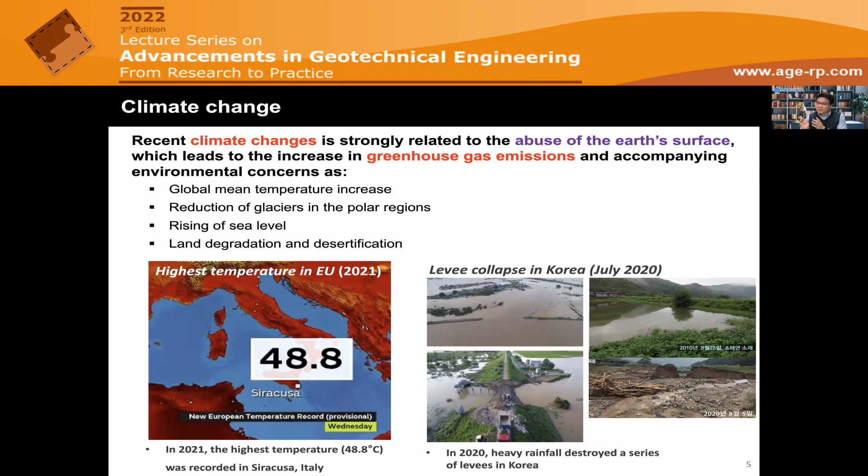So what does this mean? The Earth is getting hotter and hotter, and that climate increase is resulting in more severe and more frequent geotechnical engineering hazard events. So what happens all around the world? We have more concentrated and heavy downpours, and they are inducing and rendering floods.

And sometimes these floods can also accompany severe failure, subsequent levee or earth dam failures due to these abnormal climate events. So just 3 years ago, we had a very severe dam collapse in Laos and a very heavy flood in Japan, which also caused serious and significant casualties and costs.

Furthermore, as a result of global warming, more intense wildfires are happening all around the world, resulting in increased land degradation and geotechnical engineering risks such as landslides. And as a lump sum, we are facing more and more severe economic damages and costs related to these climate change related geotechnical engineering hazards.

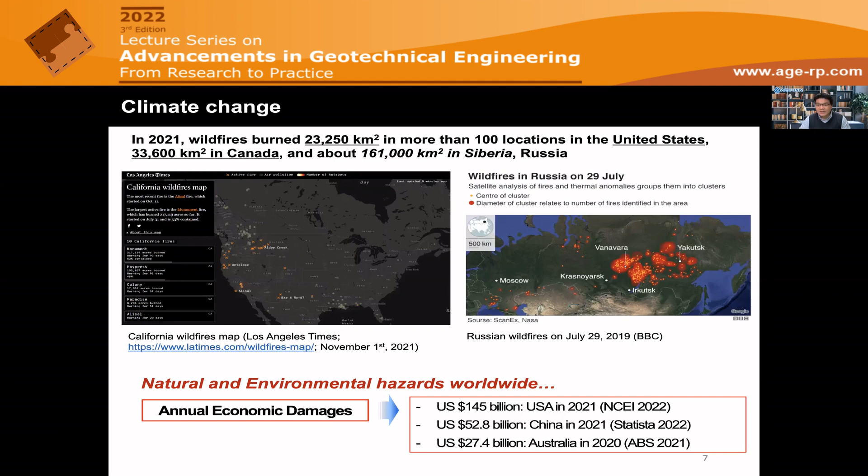For a particular subject, if we take a look at desertification, my research group performed a deep data analysis 6 years ago to see what desertification actually relates to in terms of geotechnical engineering. We randomly selected 88 soil samples data from all around the world and analyzed their particle distribution.

We found that in terms of geotechnical or soil science, desertification can be explained as a soil composition transform from a well-distributed soil to a poorly graded soil, with the reduction in clay content and relative increase of sand content. This means desertification can be expressed as a soil composition transform from a cohesive soil to a cohesionless soil. So what does this cohesionless soil mean? Because they lose interparticle interaction and cohesion, they become more prone to wind or water-induced erosion events.

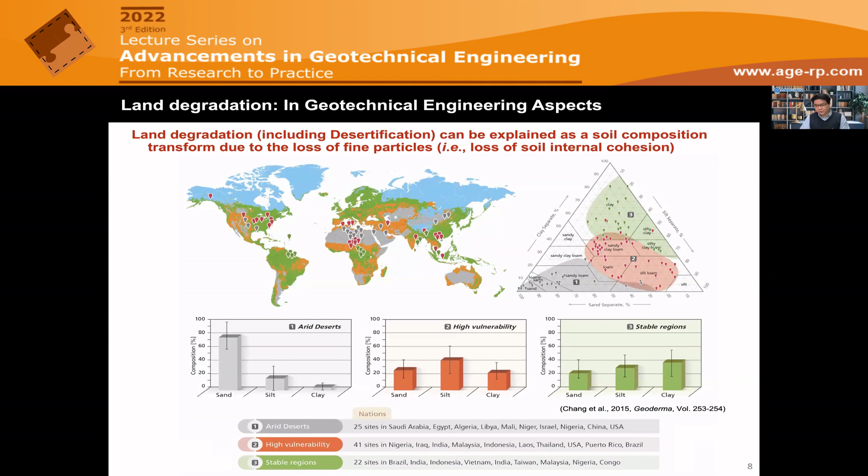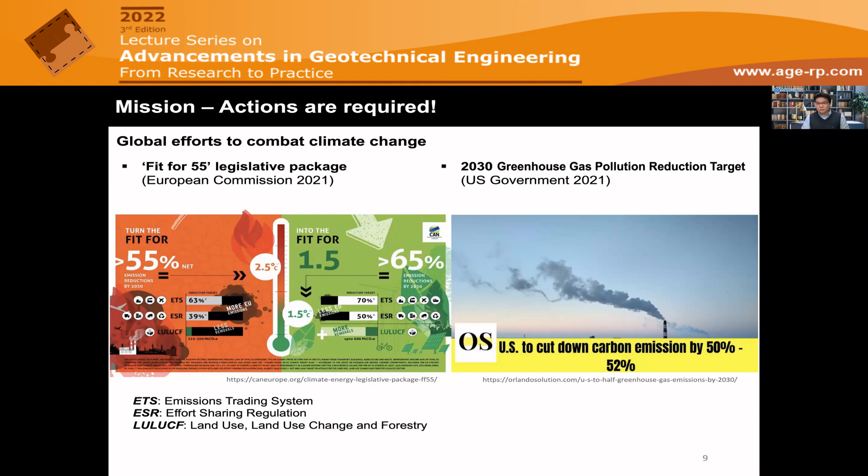Nowadays, all governments and institutions are aiming to combat current climate change. The European Commission seeks to reduce greenhouse gas emissions by more than 55%, whereas the US government wants to reduce emissions by 50% in just 10 years. So what does it mean? We have to do something urgently to reduce CO2 emissions.

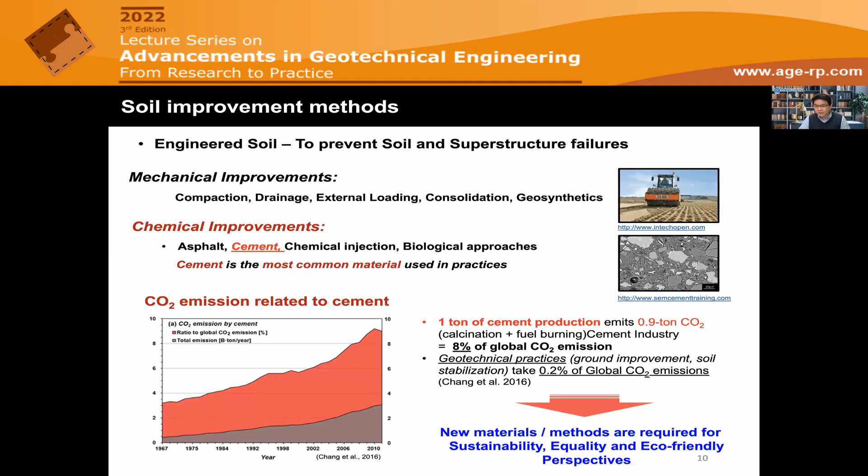In geotechnical engineering, we are facing a dilemma. We generally execute ground improvement procedures with conventional cement to enhance soil strength. However, cement has been condemned as a significant CO2 emitting material, accounting for over 8% of worldwide CO2 emissions. So as a result, we need to find a new geotechnical engineering material and method to reduce the usage of this high CO2 emitting material in construction and geotechnical engineering.

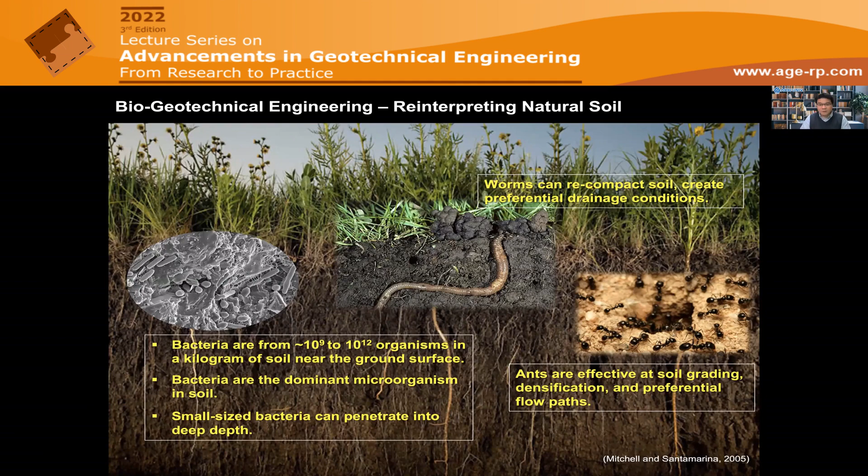As an alternative, I was focusing on biopolymer-based soil treatment. The basic idea is this: despite the fact that modern soil mechanics regards the ground and soil as an inorganic material, a range of organic compounds are produced in natural soil by small organisms and bacteria. What are these organic compounds, and what is their role?

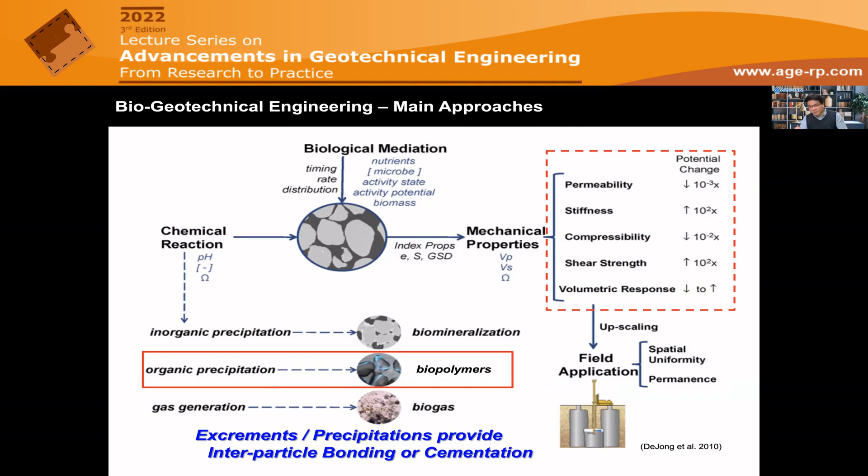They have some very distinctive functions in the soil. Specifically, the chemical activities of microorganisms precipitate inorganic minerals such as calcite, or sometimes organic compounds such as biopolymers. The mechanical properties of the soil are affected by these excretions. Particularly, interparticle bonding can be improved, or sometimes these precipitations can clog and fill the pore spaces and induce conductivity reduction, conductivity control, or something else.

Among the different types of biological soil treatment approaches, microbial biopolymers are high molecular polymers produced by living organisms, which have been widely used in a variety of industrial fields, except for civil and geotechnical engineering.

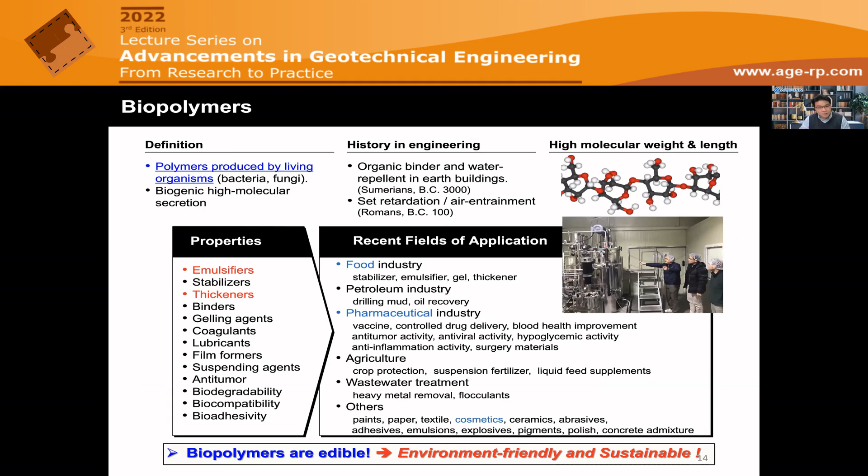Biopolymers can be classified into three main categories: high molecular chain type polysaccharides, gelation polysaccharides, and protein and lipid. Because each group has its unique set of advantages and disadvantages, careful selection is essential in geotechnical engineering. So today I'm going to show the expectations and current limitations of using these biopolymers for soil treatment and ground improvement.

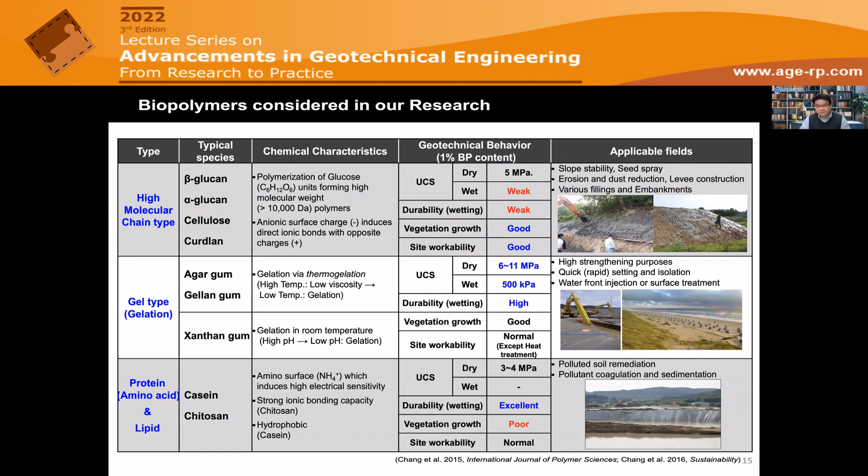Unlike MICP or EICP, where endocultivation is essential for microbial-induced calcite precipitation, for biopolymer treatment, exocultivated biopolymers can be produced out from the soil from a well-controlled facility. We just separate the produced biopolymers and utilize them as soil binders. We can mix it with soil, we can inject them into the soil, just like other pre-existing common soil binder types. This is one of the biggest advantages of using biopolymers for soil improvement.

We can also control the quantity. For MICP or EICP, we cannot control how much calcite will be produced in a certain time. We cannot ensure it. But for biopolymers, we can just set, say, we want to mix 0.5% or 1% of biopolymers relative to the mass or weight of soil, and then we can conduct it. That is the biggest advantage of using these biopolymers.

So first, let's see how these biopolymers interact with soil particles. Biopolymers are hydrophilic; they have high hydrophilicity. With the presence of water, they dissolve well into water and form viscous hydrogels. These hydrogels have shear thinning and thixotropy characteristics. With a small amount of biopolymer, we can generate a consistent clay slurry material that may also be used in drilling and tunneling excavation practices.

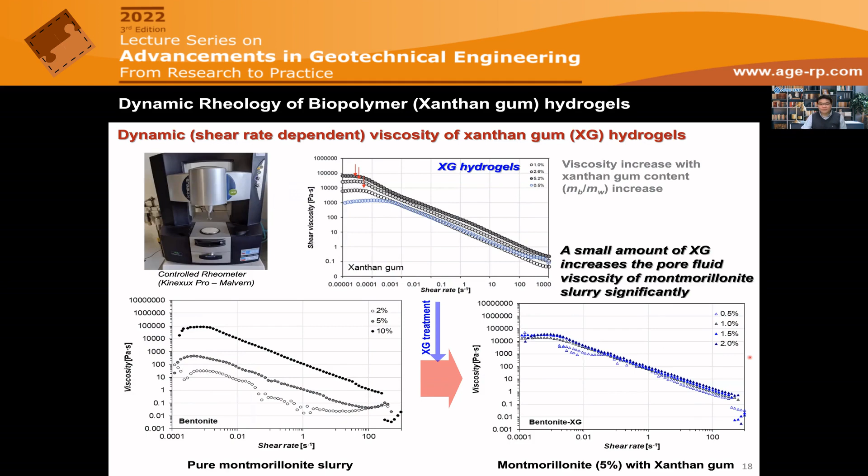These biopolymers have some surface charge characteristics. Most biopolymers used in my research have anionic, negative charges along the polymer chain. With this negative charge, they can easily form ionic bonds with clay surfaces, but with coarse grained soils, whose surfaces are electrically neutral, they don't have direct interaction with the coarse grained particles. Instead, they accumulate like this and form a very firm and continuous matrix as a reinforcement member.

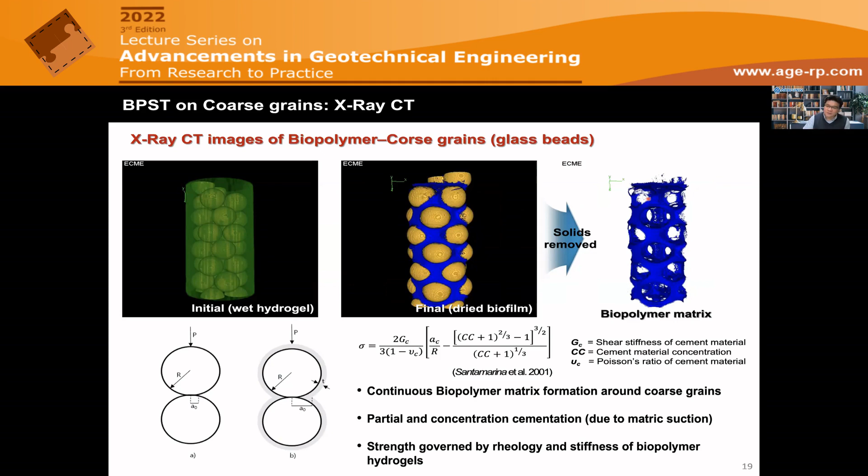Using microfluidic chips, we can also measure the production of biopolymer hydrogel matrix among coarse particles. Biopolymer hydrogels are injected into these microchip geometries, which represent sand particles with varying porosity conditions and a diameter of 1 millimeter. We can see how biopolymers condense and form surface coats and interparticular bridges through dehydration using high-resolution microscopy.

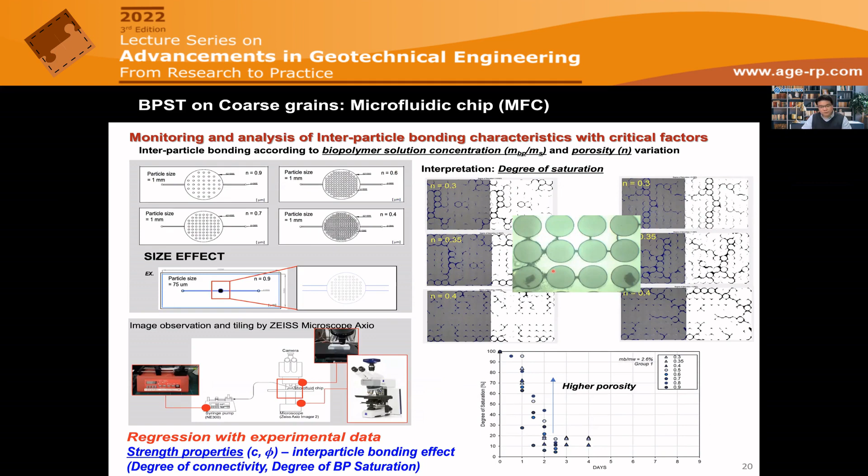The flock size, number of bonds, degree of pore saturation, total bonding length, and other interbonding indicators of the biopolymer matrix are investigated. We are attempting to correlate these indicators with strength parameters such as interparticle cohesion and friction angle, to see how biopolymers interact and form a matrix among coarse-grained soils, and how this reveals mesoscale properties of soil particles.

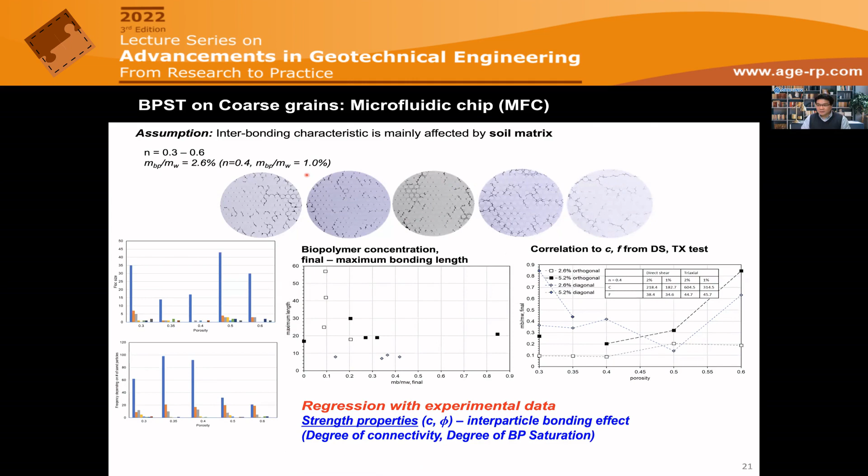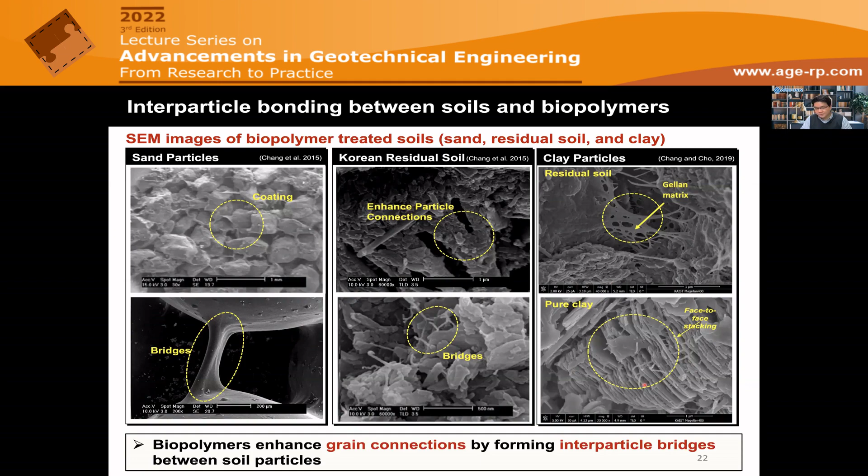The biopolymer hydrogel matrix among coarse particles enhances the shear strength of sands. When we conducted direct shear testing on xanthan gum biopolymer treated sand, biopolymer hydrogels revealed interparticle cohesiveness for cohesionless coarse particles and increased the friction angle when the hydrogel condensed through dehydration. So the point is here.

When hydrogels fully fill the intergranular pore spaces, the viscosity of these hydrogels is revealed in terms of apparent cohesion for the soil. As these hydrogels dry and become condensed, what happens? These condensed hydrogels restrict the movement of soil particles, so they both have an effect on increasing both the dilatancy and the friction angle of the soil. This is how they enhance the shear strength of sand soils.

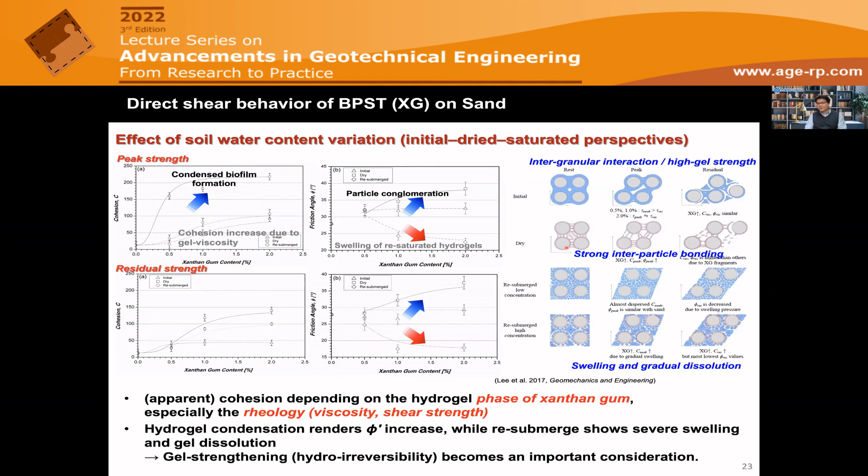This behavior is also realized from triaxial testing. The hydrogel phase, in fact, has a considerable influence on the biopolymer action on coarse-grained particles. Biopolymers have less effect on the friction angle and only provide minimal particle cohesion when fully hydrated. But once they undergo a dehydration process, it results in solid interparticle connections, which enhances both interparticle cohesion and friction angle substantially.

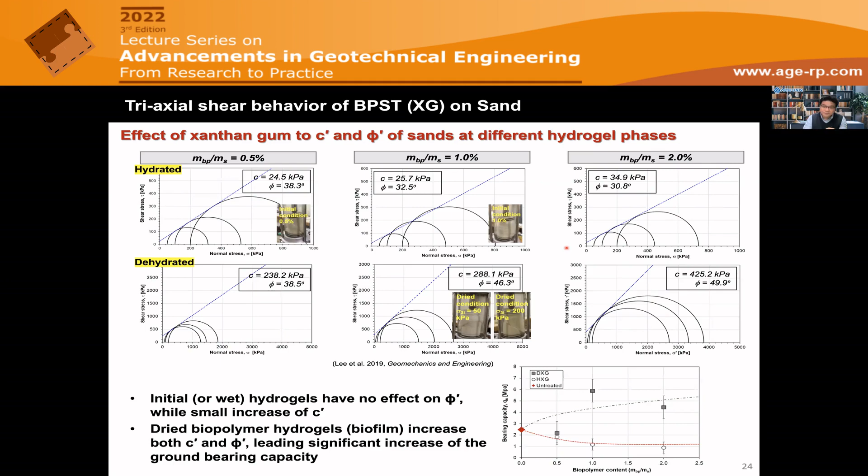Now let's see what happens to clays. When we treat clays with biopolymers—for instance, when we treated kaolinite clay with xanthan gum biopolymer—the direct biopolymer-clay matrix formation in clay soils reveals distinctive liquid limit and plasticity index increases, implying the promotion of ionic bonds between clay surfaces and biopolymers.

With a small amount of biopolymer treatment, it increases both the liquid limit and plasticity index of clays. In terms of the enhancement of the electrostatic bonding between clay particles and biopolymers, which reduces the surface potential for ionic bonding, this is also implied by the simultaneous decrease in electrical sensitivity of clays with biopolymer treatment. So what does this mean?

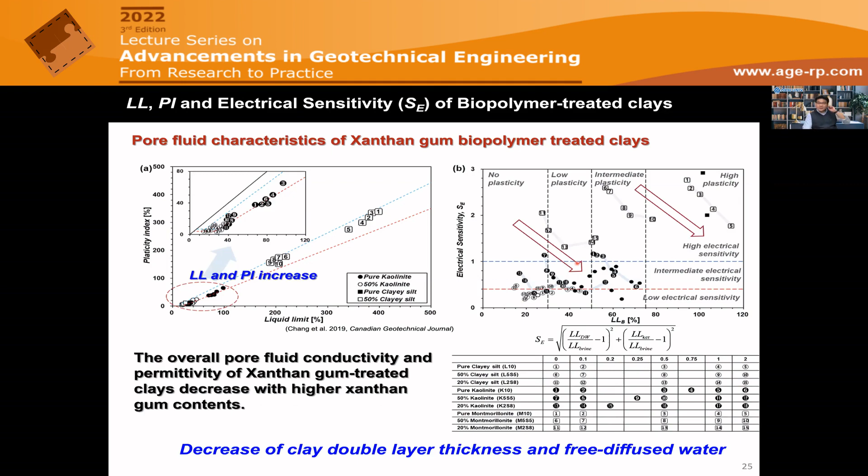The electrostatic interaction between clay particles and biopolymers also influences the sedimentation process of clays. In the laboratory, we prepared a very high water content clay suspension and conducted sedimentation testing. With the presence of xanthan gum in a highly dispersed clay suspension, xanthan gum promotes the early aggregation of clay particles. On the left-hand side, we have the final sediment of natural kaolinite clay.

On the right-hand side, we have clays treated with different levels of biopolymers. With a higher amount of biopolymer treatment, we can see bigger and larger aggregates formed on the bottom, compared to the natural sediment. So xanthan gum definitely promotes the early aggregation of clay particles to form larger aggregates.

Because of the xanthan gum induced aggregates, the sediment settles faster and also has a higher final density. So what we are expecting is that, if we can ensure some economic feasibility, biopolymer treatment can also be utilized and implemented for reclamation processes. We hope this small amount of xanthan gum biopolymer treatment can have an optimistic function on promoting and accelerating the in situ sedimentation and self-weight consolidation process after we dredge and reclaim clay to a new site.

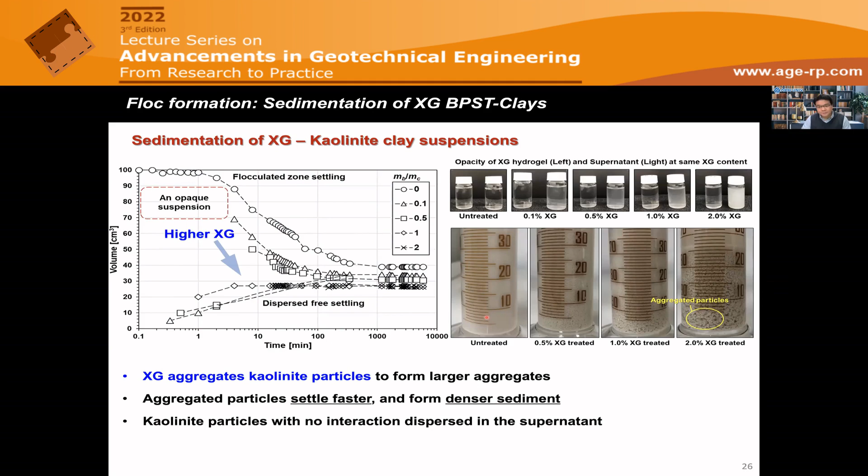The formation of a biopolymer clay matrix improves clay's undrained shear strength, but it does so in diverse ways. When a single water content condition is considered, on the left-hand side, a 0.5% xanthan gum treatment produces the largest undrained shear strength, whereas higher biopolymer contents have less effect. As a result, the liquidity index and undrained shear strength have a single relationship, indicating that biopolymers have no effect on the clay mineralogy and are exclusively used to produce interparticle connections and pore fluid thickening.

When we change our perspective to a constant void ratio scenario, however, more xanthan gum concentration leads to increased undrained shear strength. Triaxial test experiments under undrained conditions reveal a progressive increase in undrained shear strength, also indicating that xanthan gum content greater than 0.5% primarily increases the pore fluid viscosity. As a result, xanthan gum treatment has the ability to improve the ground bearing capacity of weak and soft clays, allowing for in situ activities to be implemented.

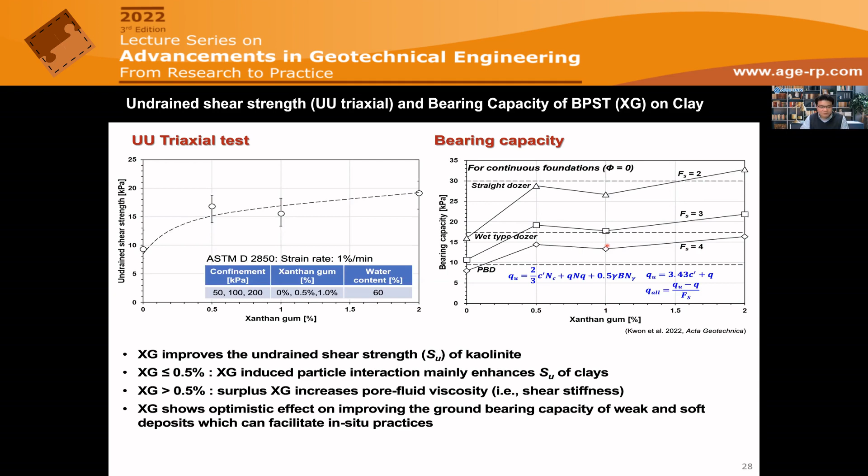The compressibility and swelling of saturated clays are both increased by xanthan gum treatment, although the effect on swelling is more noticeable. In fact, biopolymer treatment decreases the coefficient of consolidation due to the pore clogging effect induced by biopolymer hydrogels.

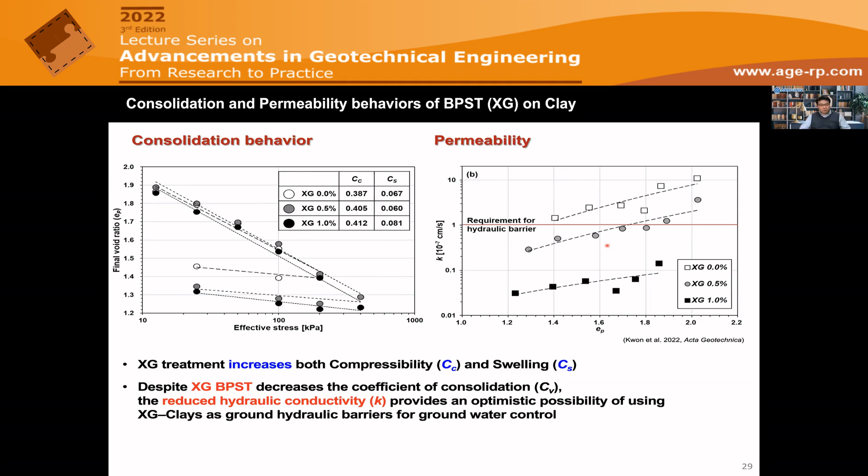However, this means that biopolymer clay mixtures have a potential to be used as ground hydraulic barriers for groundwater control. So we are conducting some preliminary research to assess the feasibility of using biopolymer treated clay as clay liners for municipal waste deposits nowadays. In fact, because of the pore clogging effect caused by biopolymer hydrogel, biopolymer treatment reduces the hydraulic conductivity.

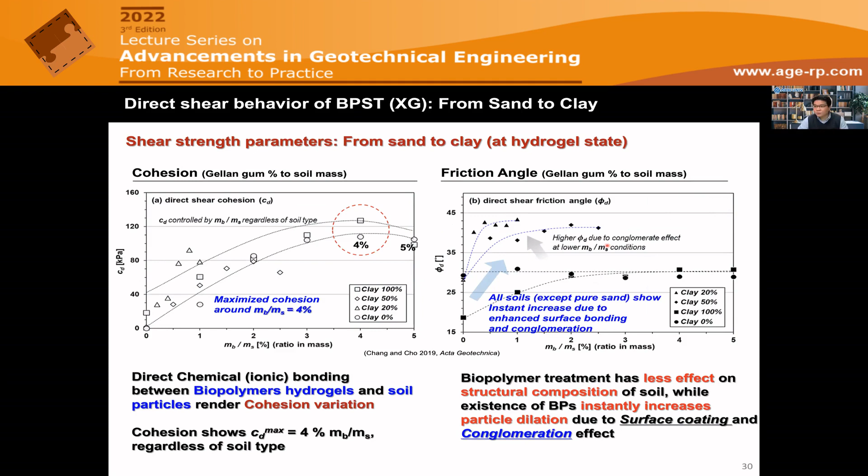In terms of the shear strength parameters, this xanthan gum clay matrix has a very promising function on increasing both cohesion and friction angle. So I want you to remember the biopolymer clay matrix becomes a very important key for the entire soil strengthening of this biopolymer treatment.

To sum up, the soil strengthening process caused by biopolymer-based soil treatment can be summarized as follows. In the case of coarse-grained soils, these biopolymer hydrogels just form a continuous matrix among granular particles, so they have a slight improvement in the cohesion, while they have less variation in terms of friction angle.

But with the presence of clay, the direct biopolymer clay matrix formation has an immediate impact on the soil cohesion and friction angle. The well-formed biopolymer clay matrices surround coarse grains and harden by dehydration in the presence of coarse particles, revealing an aggregation effect, which we defined as a conglomeration effect, optimizing both interparticle cohesion and friction angles.

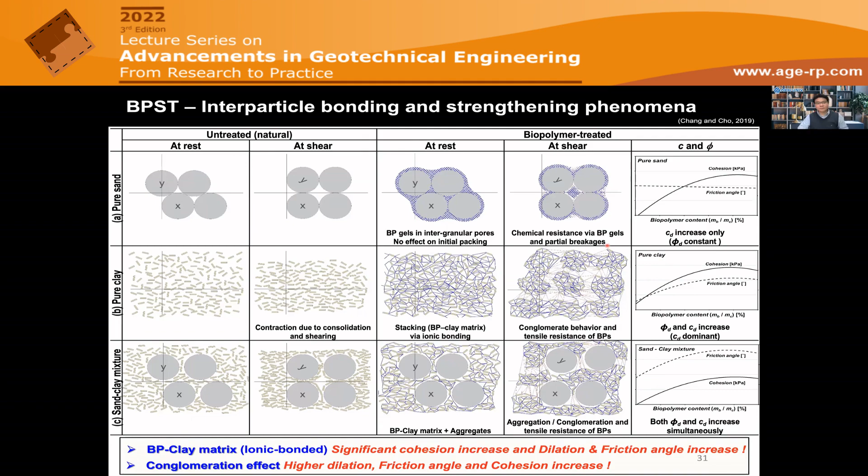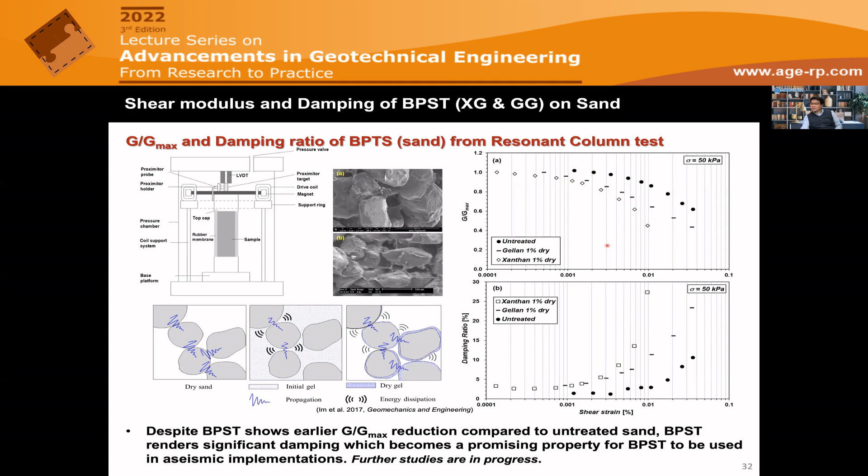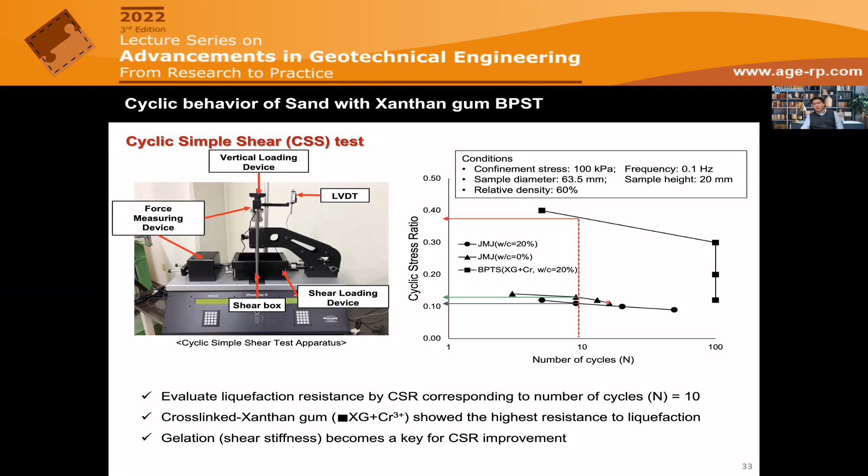So we are doing more study to see if biopolymer treatment can be used to mitigate seismic energy and also reduce the liquefaction potential for highly liquefiable sand deposits.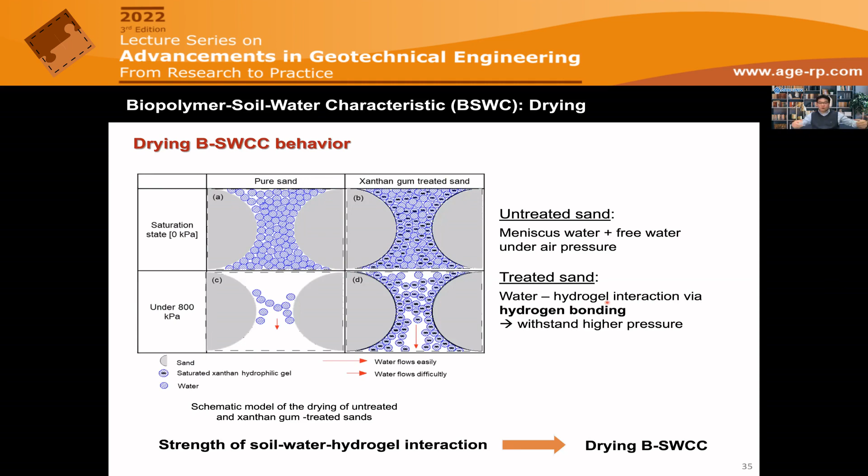Okay, so when we take a look at the hydraulic behavior, biopolymers actually increase the water retention capacity of soils because this biopolymer itself is very hydrophilic, so it means they hold water longer than untreated conditions. And when we take a look at the wetting behavior, actually the wetting behavior is quite distinctive.

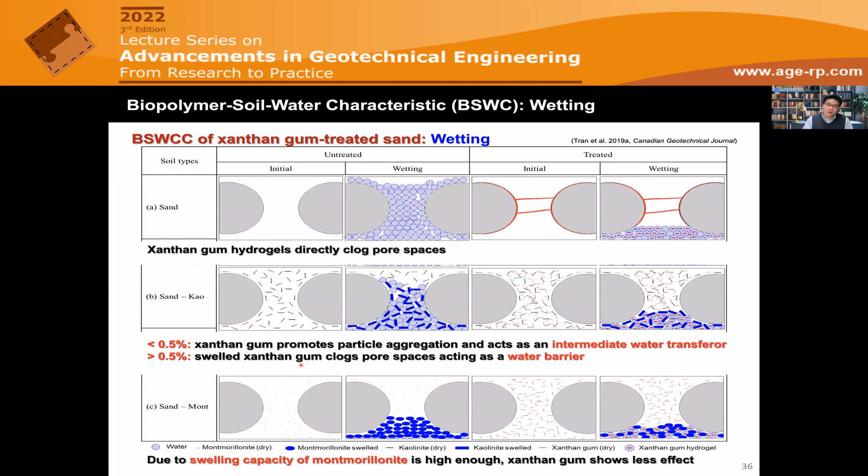When xanthan gum is treated, it causes particle agglomeration and acts as a intermediate water transferor when the xanthan gum level is less than 0.5%. But when the xanthan gum content exceeds 0.5%, swelled xanthan gum hydrogels clog the pores and interrupt the water transfer. So we have to be very careful when we want to control the soil hydraulic conductivity for these biopolymer treated conditions. The hydraulic conductivity of biopolymer treated soil significantly reduces as a result of pore clogging caused by these biopolymer hydrogels. As a result, biopolymers have the potential to be used for several groundwater control practices.

So the pore clogging effect generated by BPST gradually declines as the hydraulic pressure increases. Nowadays we are also attempting to find which water pressure condition will be the critical condition for these biopolymer treatments. We are also aiming to enhance the gel strength to make it stronger and more resistible.

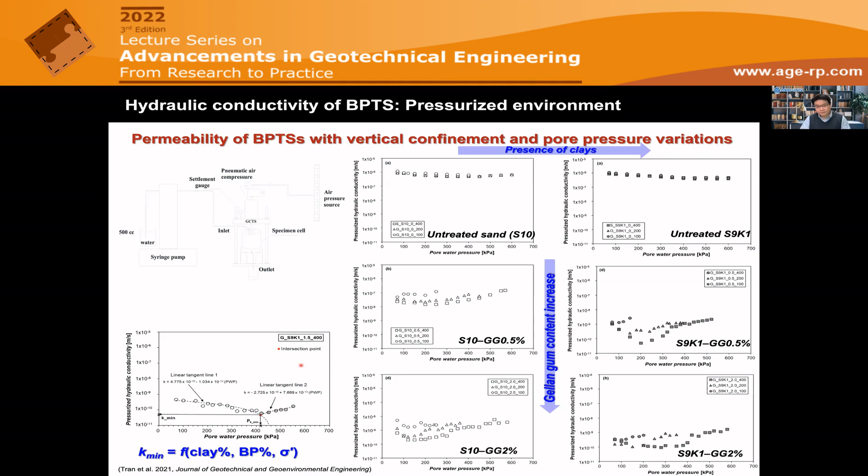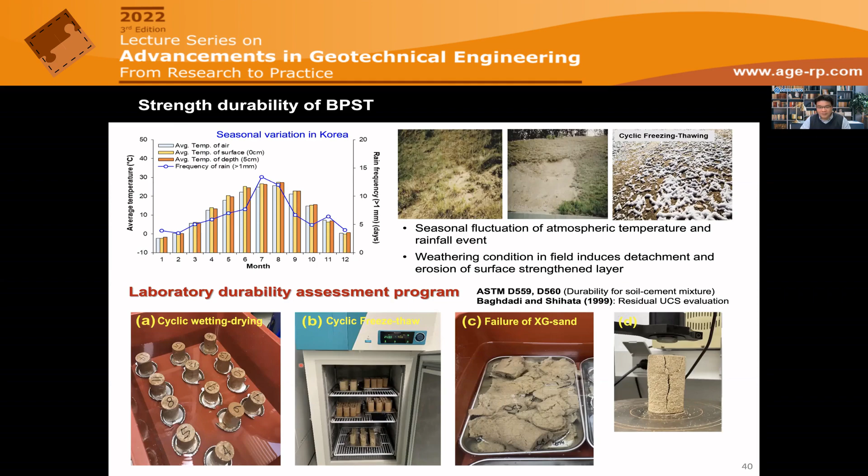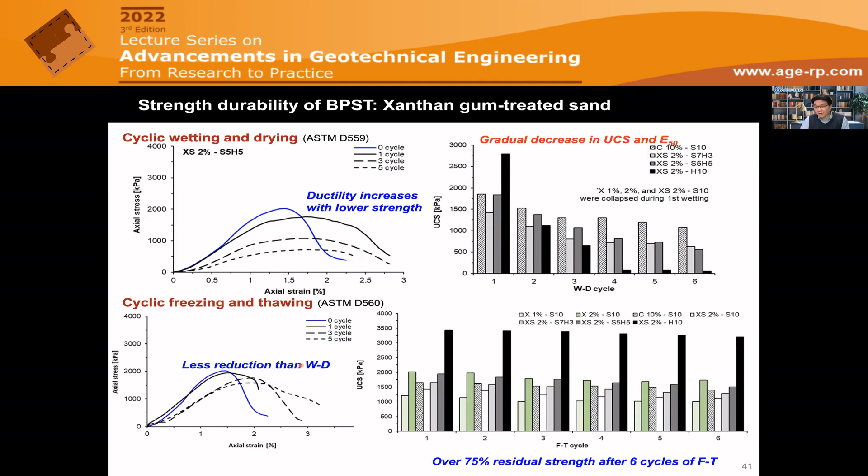But when we take a look at gel type, gellan gum-treated sand, both cyclic wetting and drying and freezing and thawing results show promising durability, even compared to ordinary 10% cement treated conditions. So we admit these biopolymer treatments are not a permanent countermeasure, because these carbohydrates have some biodegradation and also some decay due to cyclic wetting and drying and cyclic freezing and thawing programs. But what we are expecting is, at least for a short to medium term time period, they will be effective.

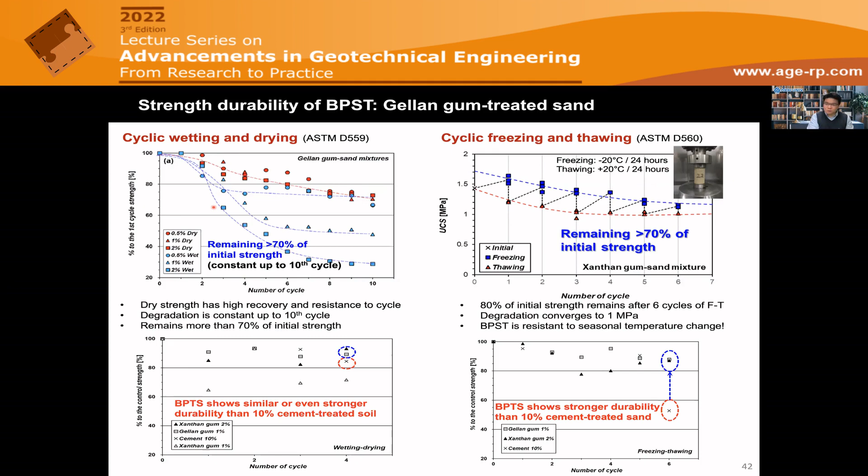They will provide significant strengthening and ground hydraulic water conductivity control. So actually we are mostly focusing on using these biopolymers for temporary ground support or improvement practices. Let me show you some more detailed examples. Indeed, if the soil has some clays, the durability becomes better, it's more durable.

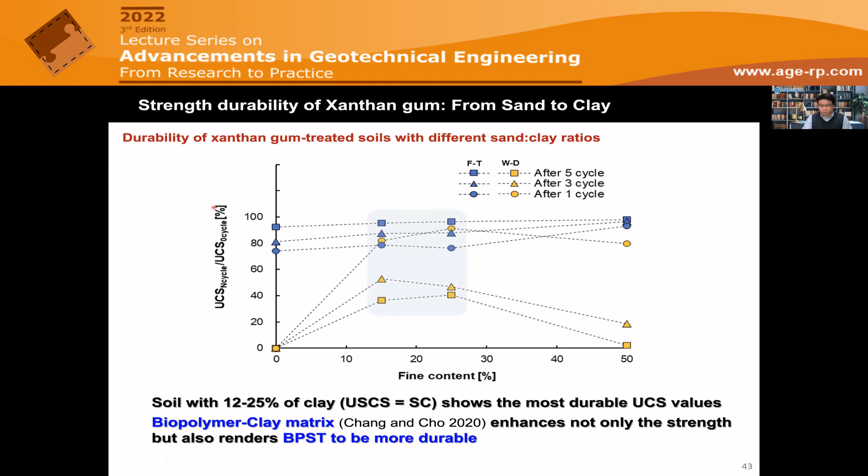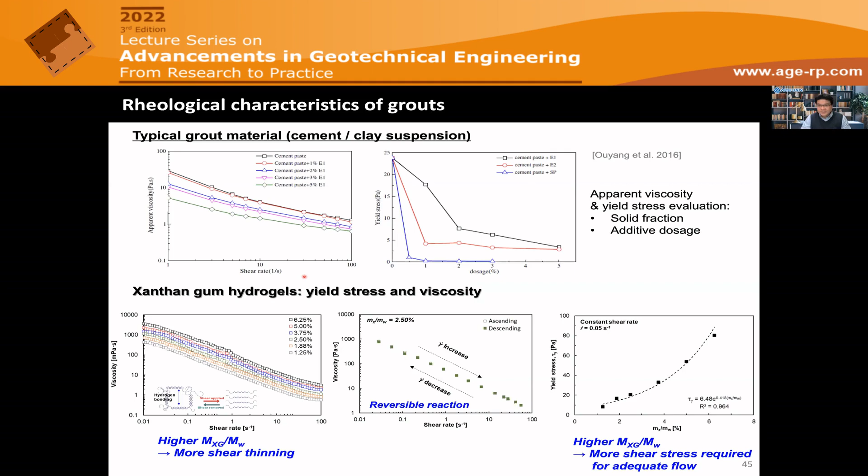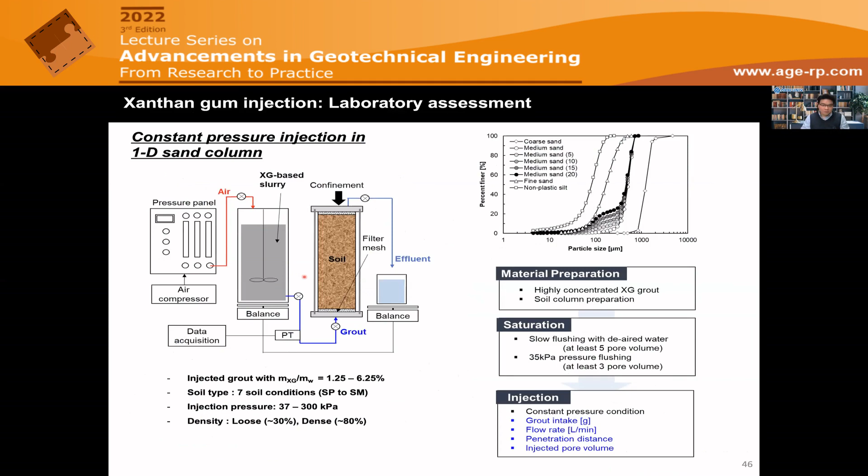The first thing we are conducting is to use biopolymers as a new grouting material for ground injection and hydraulic conductivity control practices. Due to the shear thinning properties, we can control the injection rate with different flow rates. In laboratory, we're using this sand column and injecting biopolymer hydrogels to see what happens to the permeability and other considerations. So definitely, what happens here?

If we have a higher yield stress, it means that the injectability is interrupted. So if we want to use biopolymers as a new grouting material, we have to consider the yield stress. If we apply a higher pressure, the injectability becomes better. And if the soil has a higher permeability, meaning a higher porosity, the injectability also becomes better.

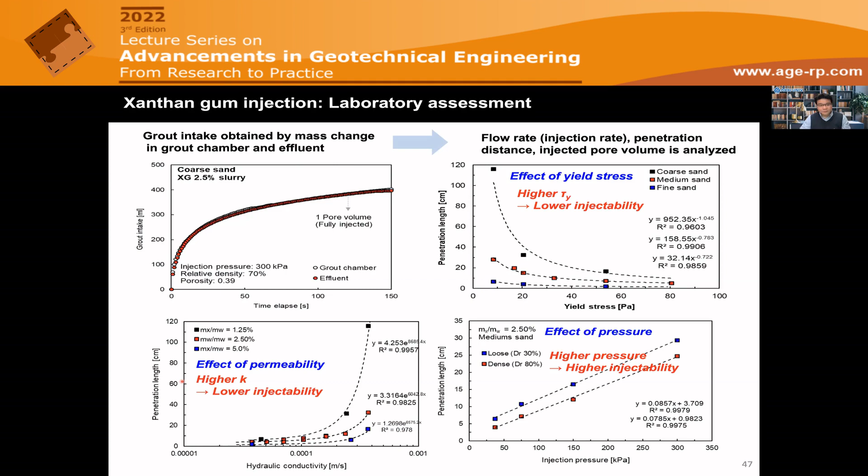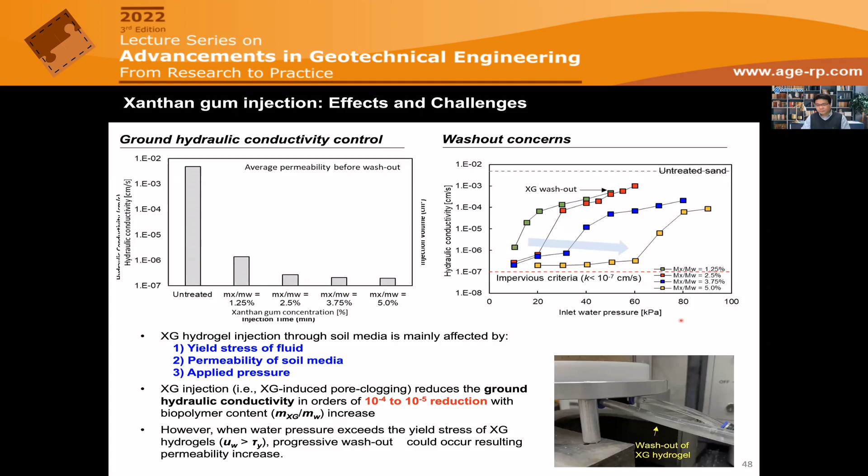So how can we implement these biopolymers in the field? Our first interest was using these biopolymers to control or even mitigate soil erosion. More extreme downpours and floods are being caused by the present global climate change, as I already explained in the introduction. As a result, we must devise a practical countermeasure to improve the mechanical stability of earth dams or levee structures in the face of a variety of hydraulic erosion triggers.

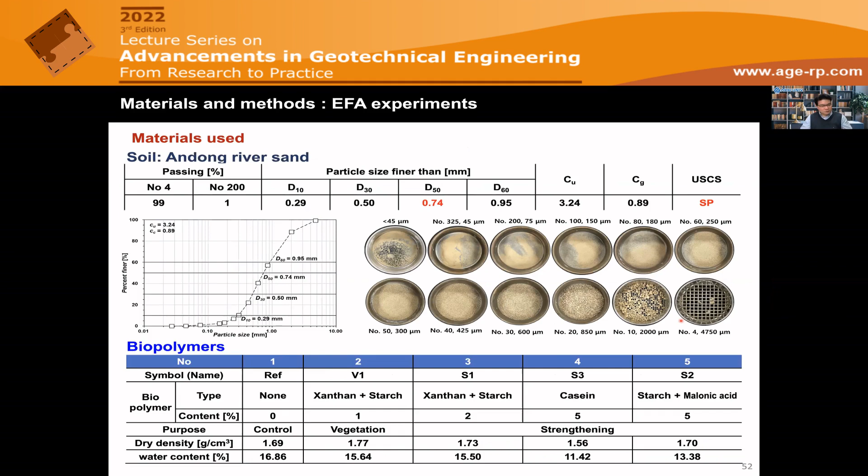In laboratory, we brought in situ levee soil and treated it with different biopolymer conditions. We attempted different types of biopolymer blends using xanthan, starch, casein, cross-linked starch, and also malonic acid. We used an erosion function apparatus, EFA, with a P-wave monitoring system, and assessed the erosion behavior of different soil compounds.

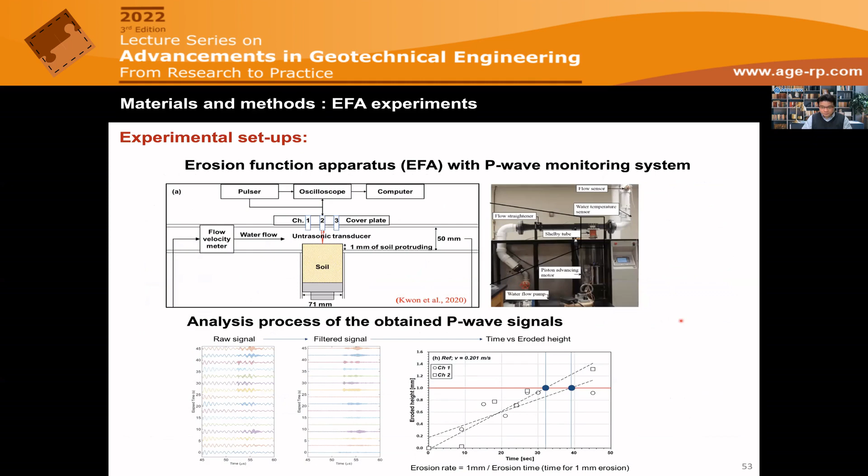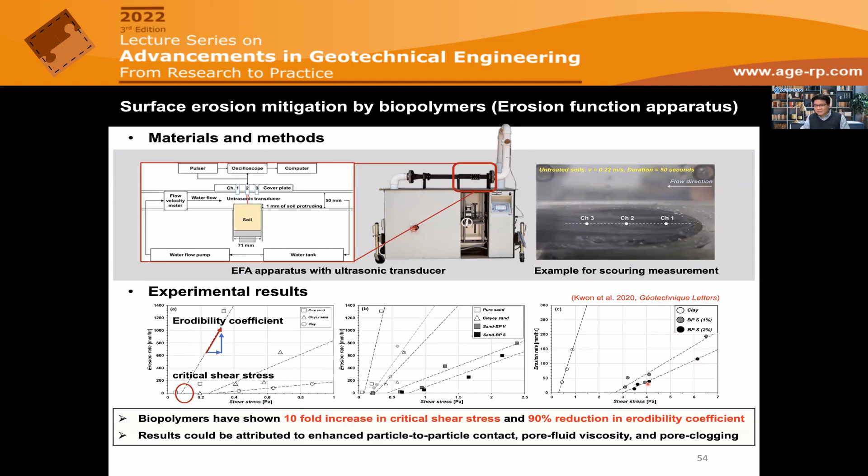We performed different types of testing. Compared to a non-treated reference, pure sand has a critical shear stress of around 0.07 pascals, but with biopolymer treatment, depending on the type, they all increase the critical shear stress. The untreated pure sand has an erodibility coefficient around 3,900, but biopolymer treatment significantly reduces it. So biopolymers have a very optimistic function on enhancing soil resistance against erosion.

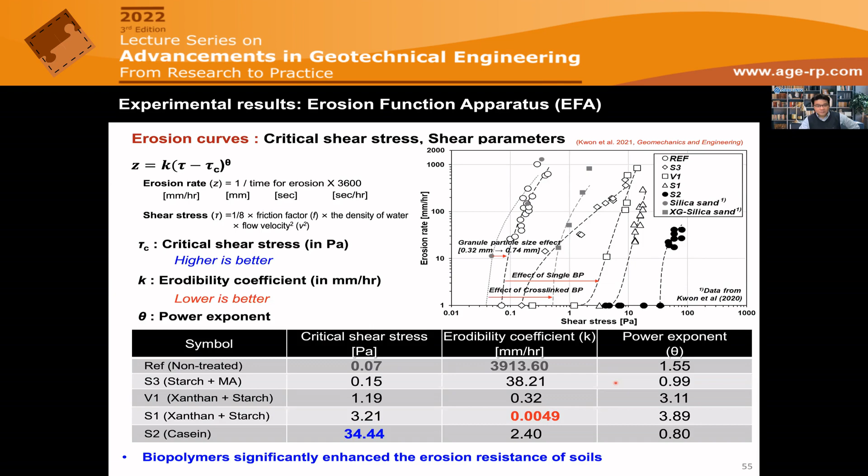With these laboratory findings, we performed numerical prediction using a SRICOS-EFA program suggested by Texas A&M, and we can see biopolymer treatment has a very promising effect on reducing natural scour in river structures. We are also conducting open channel erosion testing in the laboratory to simulate severe overtopping and internal piping conditions.

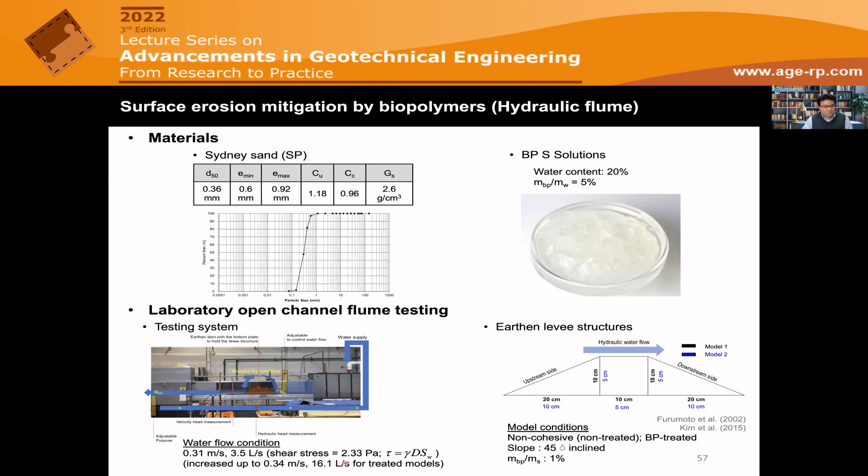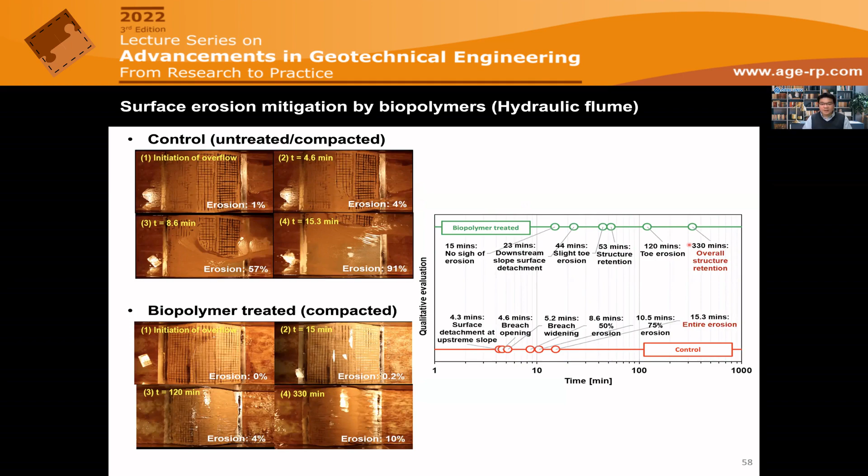So what is the expectation? This is the statistical comparison. We performed larger scale studies in the field, conducting large scale model testing using levee models with and without biopolymer treatment.

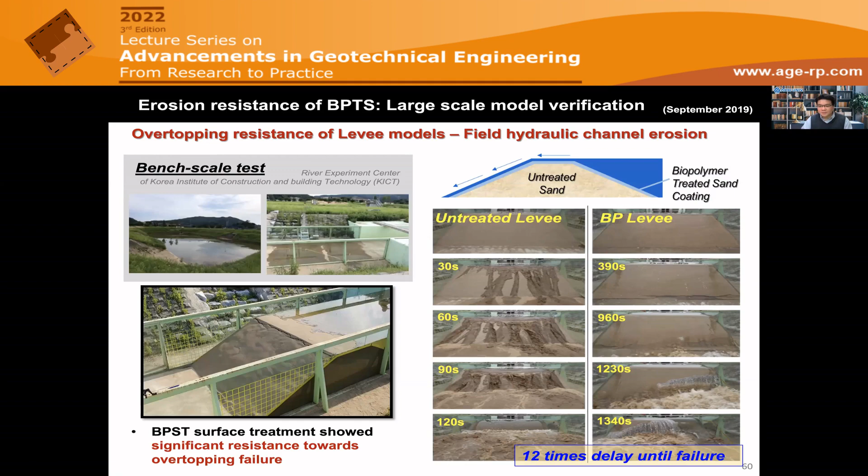Since overtopping was initiated, only 2 minutes were required to entirely erode an untreated levee model. But if the surface is slightly treated with biopolymers, it can delay the failure up to 12 times later compared to the untreated condition. A large scale levee model has been fabricated and treated with different surface conditions.

We also simulated an overflow from the overtopping on this levee model. You can see, compared to a control condition, biopolymer treatment on the surface can delay the entire erosion and collapse.

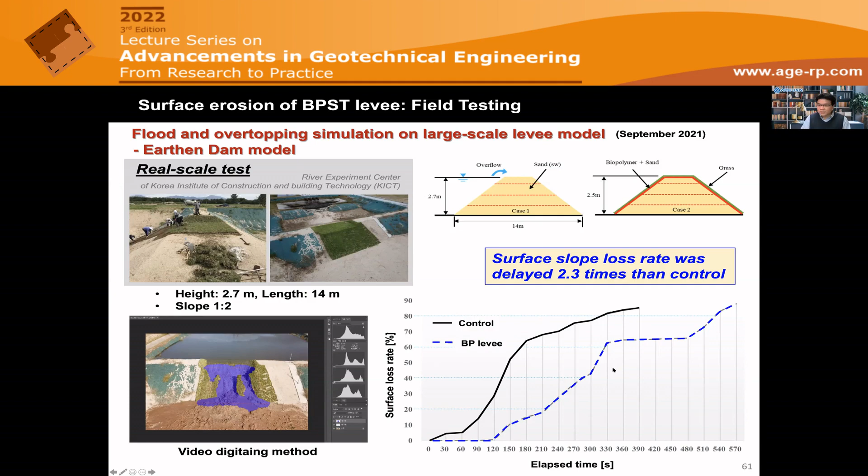Just 3 months ago, we also conducted a large-scale overtopping simulation on a levee model. We constructed this earthen levee model and simulated overtopping. It was very interesting - the surface vegetation density was significantly improved when we treated the surface with biopolymers, and it showed very promising resistance against overtopping.

Then what will happen to an internal erosion countermeasure? We fabricated a levee model with a concrete structure embedded at the bottom, representing a channel embedded under a levee structure. We initiated some erosion from the bottom of this embedded structure to see what happens to internal erosion.

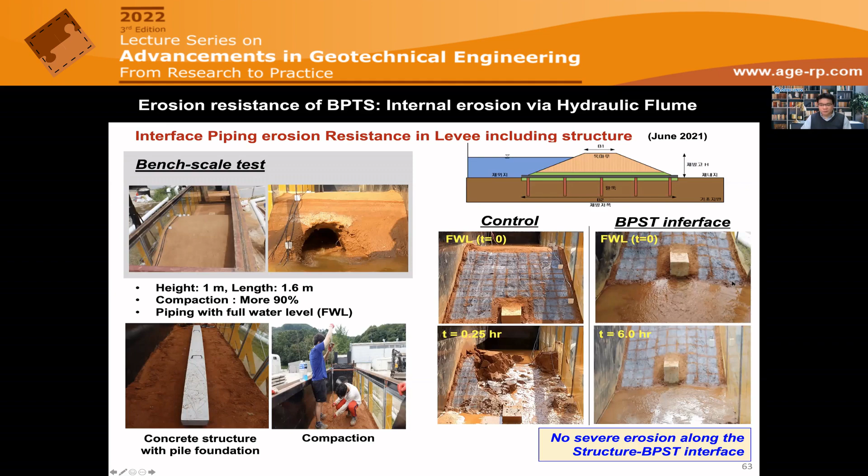Here's a video: on the left-hand side is a non-treated model, and on the right-hand side is a biopolymer-treated model. The levee model without biopolymer treatment shows progressive internal erosion and suddenly collapses with time, while the biopolymer-treated levee model shows higher and more promising resistance against internal piping erosion. With the same timeline, when the untreated levee has totally collapsed, the biopolymer levee is still working well.

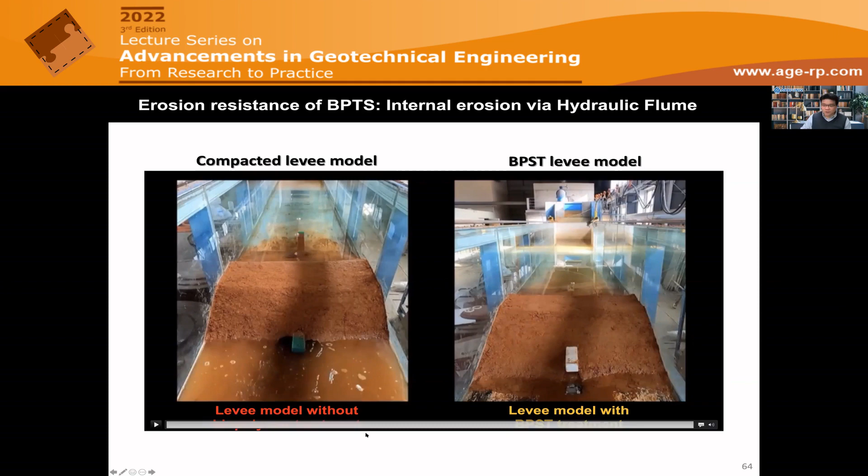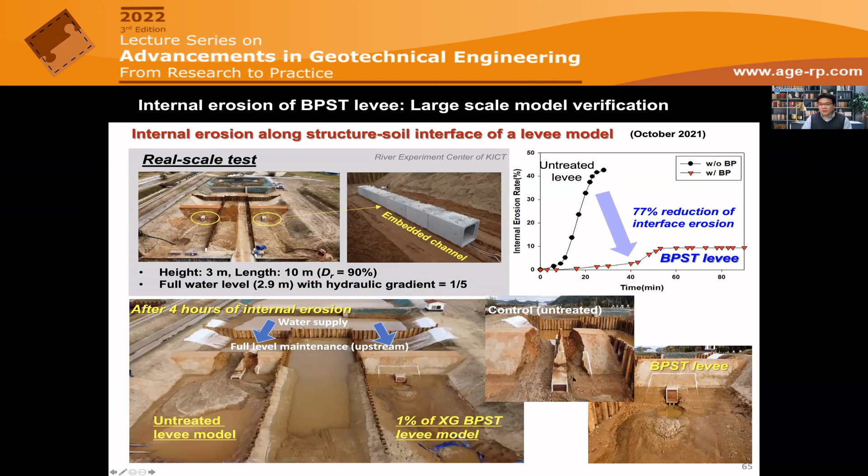We also conducted large-scale in situ testing, and we can see biopolymer treatment around a structure can reduce 77% of the internal erosion along the interface.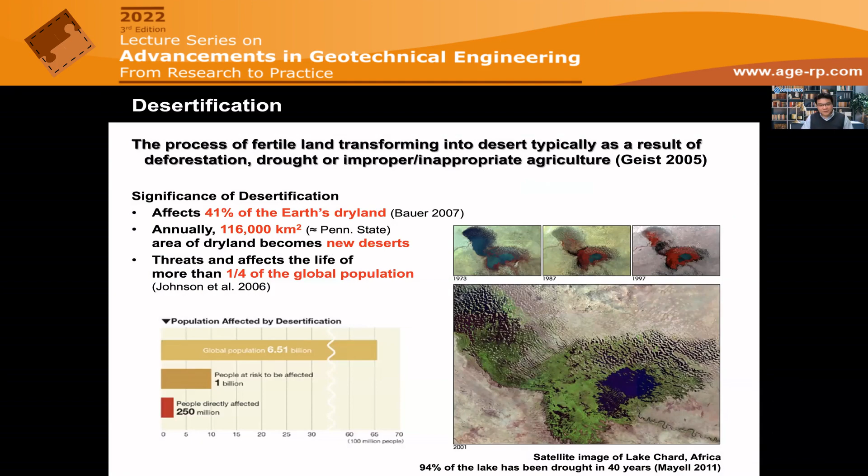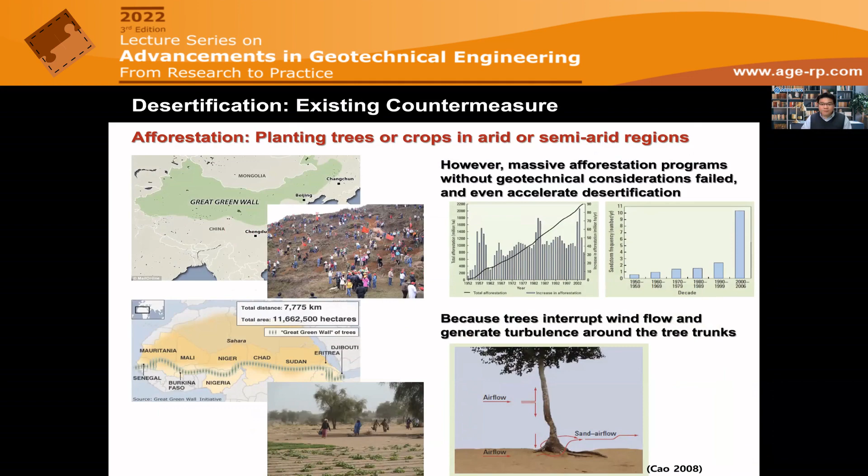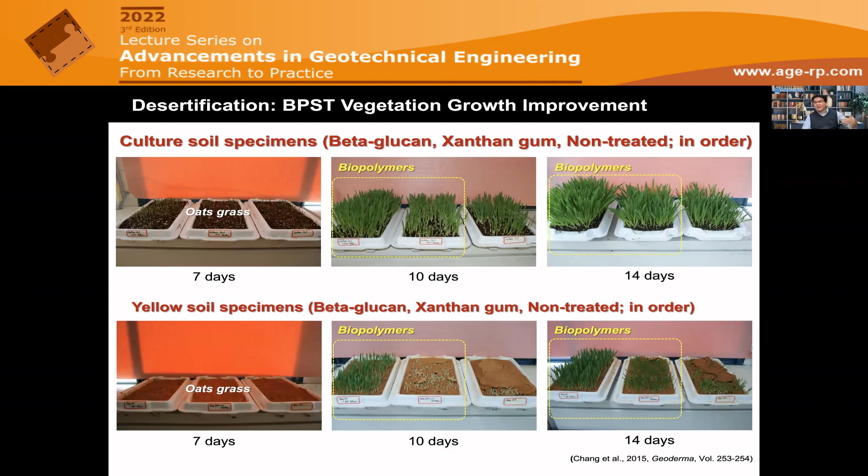There's another interest from our side to apply biopolymers - we are aiming to apply biopolymers for anti-desertification practices. First, biopolymer treatment increases soil erosion resistance. We also found these biopolymers have a promising function in promoting and facilitating vegetation growth in terms of seed germination and crop growth, so we are combining these together. Also under severe drought conditions, crops in biopolymer treated soils show higher survivability. With these concepts, we're now also exploring applying biopolymers for anti-desertification practices.

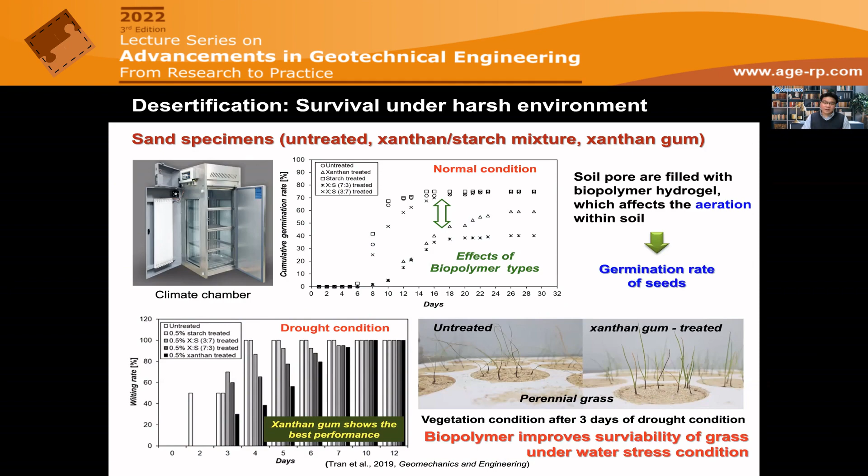So let me move on to what other practical implementations are possible. 10 years ago, we preliminarily attempted slope stabilization with biopolymer hydrogels. We also successfully constructed a non-cement, non-asphalt pavement using just biopolymers and in-situ soil mixtures, and we constructed an adobe building with biopolymers and soil itself.

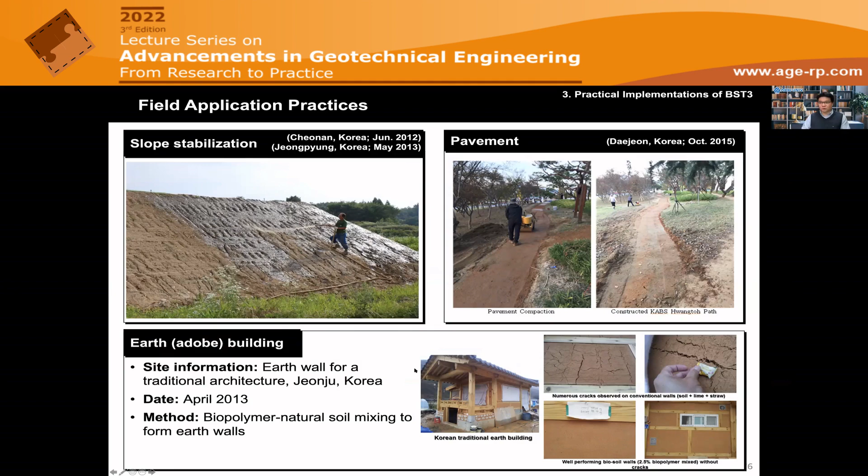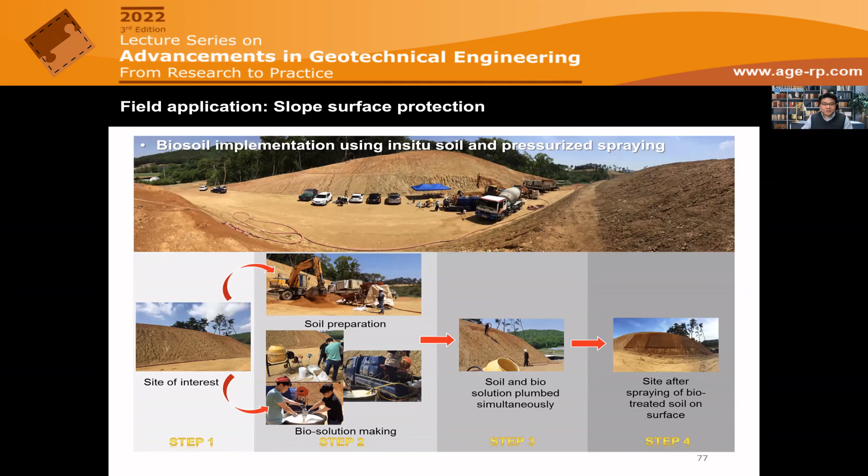For further advancements, we invented and developed a biopolymer spraying system using in-situ soils and biopolymer hydrogels simultaneously. You can see here that we can spray biopolymers and soil together to form a uniform surface protecting layer. And what else is expected?

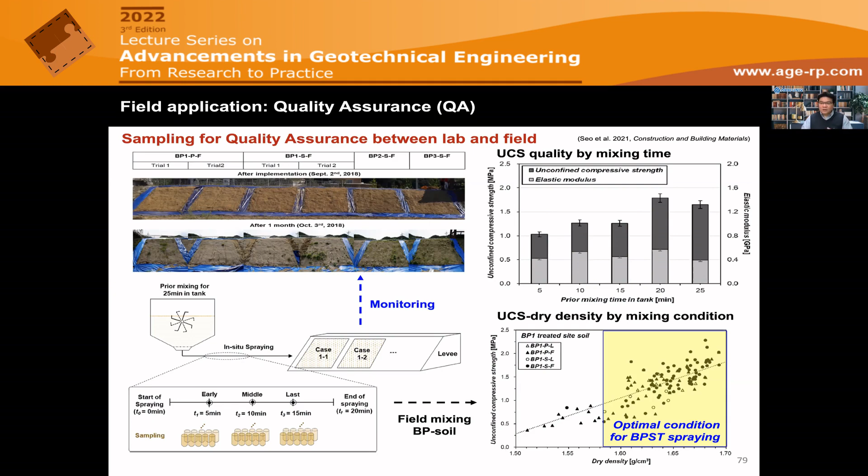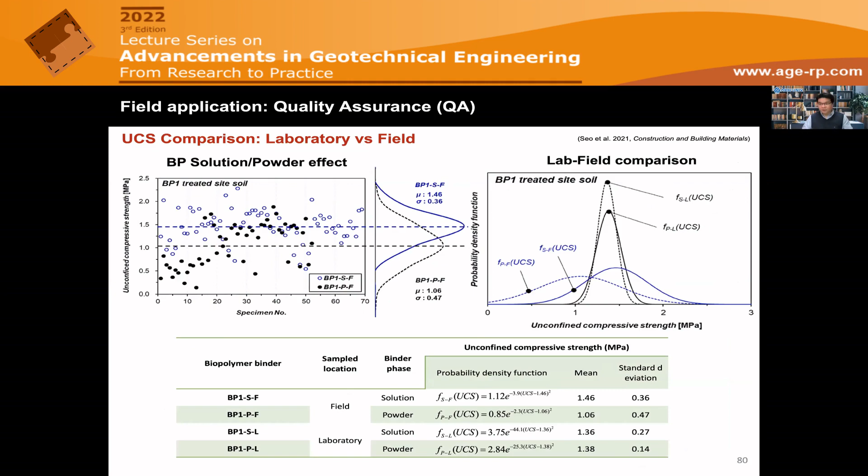We have to ensure the field behavior is similar or repeatable compared to laboratory conditions. So we collected around 300 samples from the field, performed some statistical analysis, and found that the field and laboratory strengths are quite similar to each other. So this biopolymer treatment is quite repeatable and reliable for field implementations.

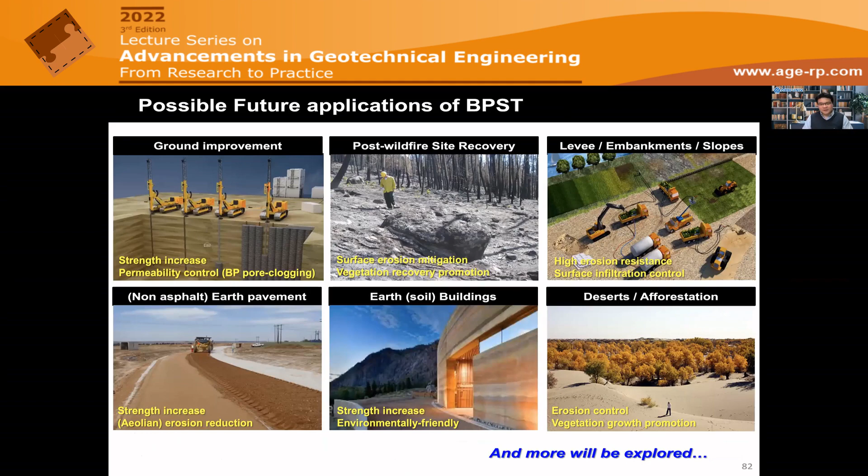So what other future applications can be possible? We can see ground improvement, post-wildfire site recovery, non-asphalt pavement, earth buildings, and afforestation practices. Economic feasibility is also a main consideration, and to give you a conclusion, it is nowadays very competitive and economic.

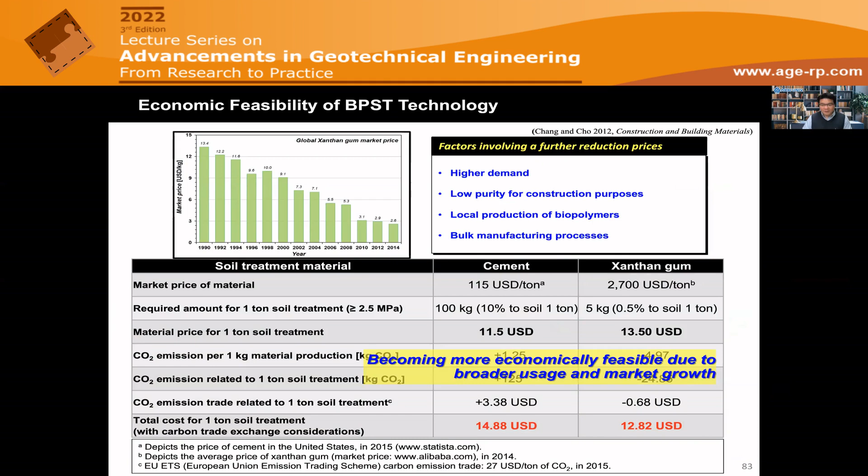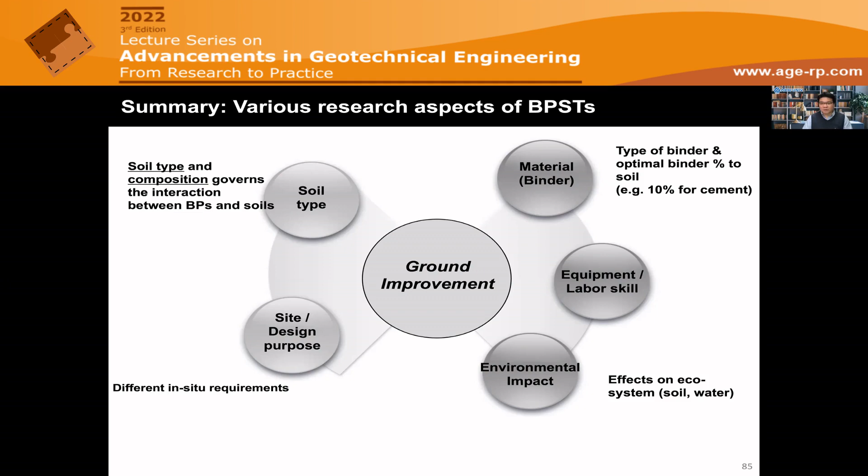So to close my talk today, when we consider general ground improvement practices, we have to consider soil type, what material or binder is going to be used, what equipment is going to be implemented, and what will be the environmental impact from this practice. So for biopolymers, they all satisfy and have a promising fact for these five different considerations.

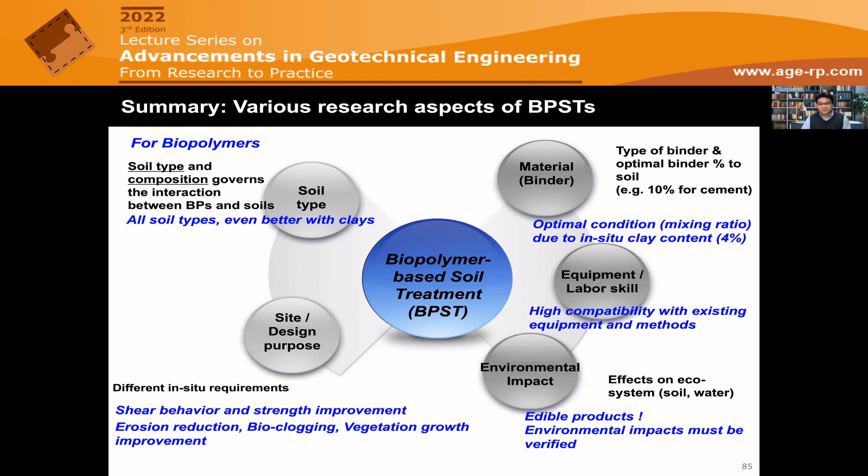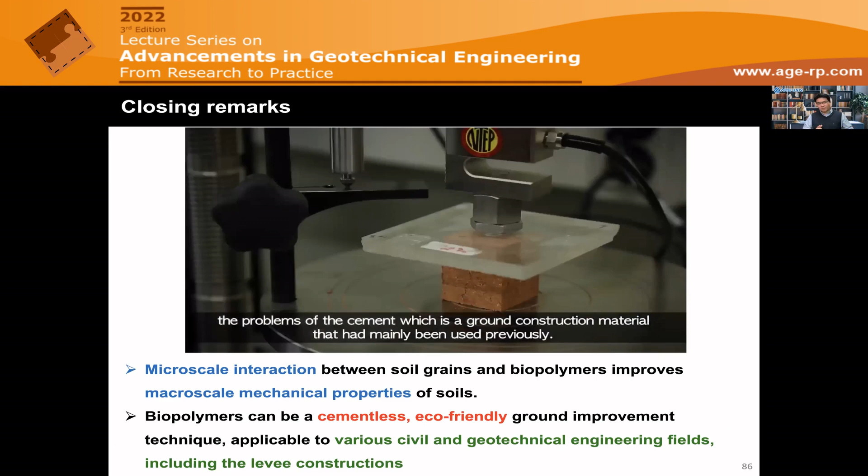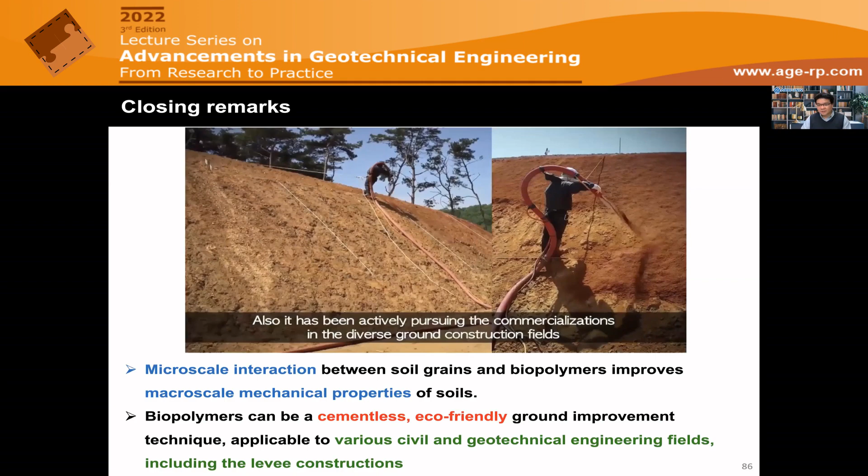So to give you closing remarks, microscale interaction between soil grains and biopolymers improves macroscale mechanical properties of soils. Biopolymers can be a cementless, eco-friendly ground improvement technique applicable for various civil and geotechnical engineering fields, including levee constructions and anti-desertification practices. So this is the end of my presentation.